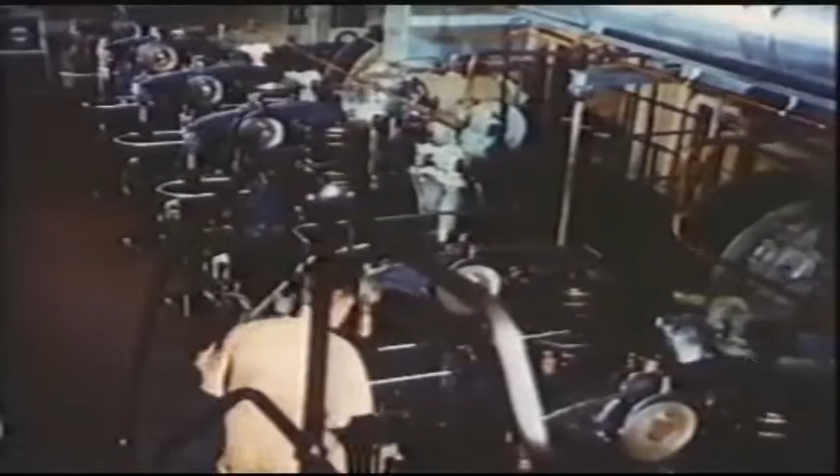Today, the diesel engine propels half the tonnage of all the world's shipping. Given good care, the diesel engine provides a maximum of effect on a minimum of oil consumption.

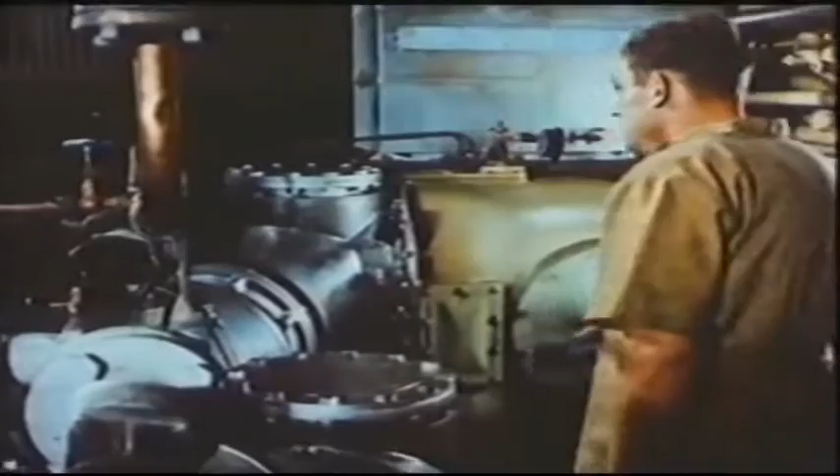The engineer will see to that. At the moment, he's checking the temperatures of exhaust and cooling water. His routine inspection takes him further down to the second platform with the intercoolers for charging air.

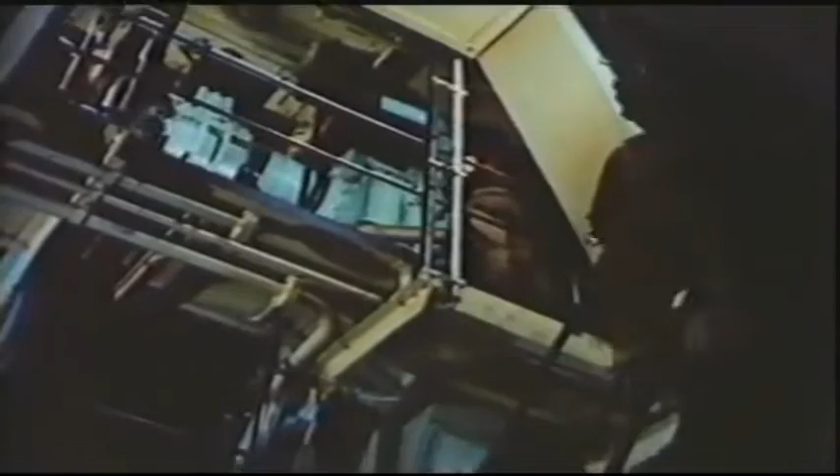Now he reaches the bottom, where his flashlight reveals the return piston cooling oil behind the sight glasses. To make a further study of the diesel engine, we leave the engineer and his instruments and put sight glasses on the engine from top to bottom.

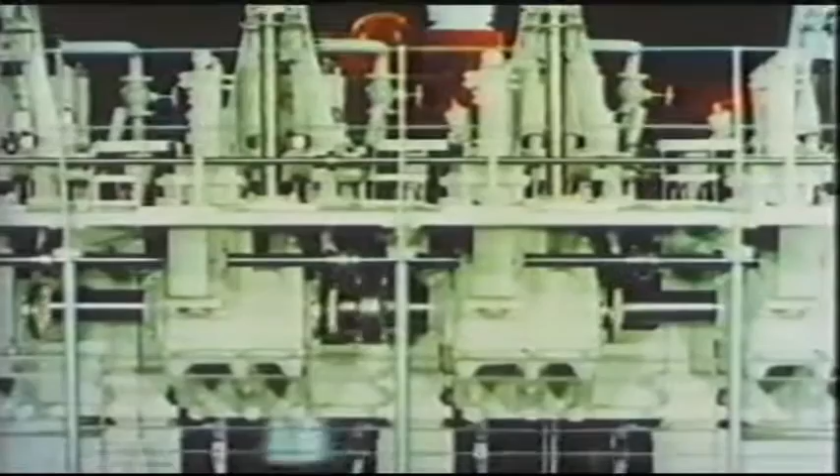This reveals the movable parts: pistons, piston rods, crossheads, and connecting rod and crankshaft.

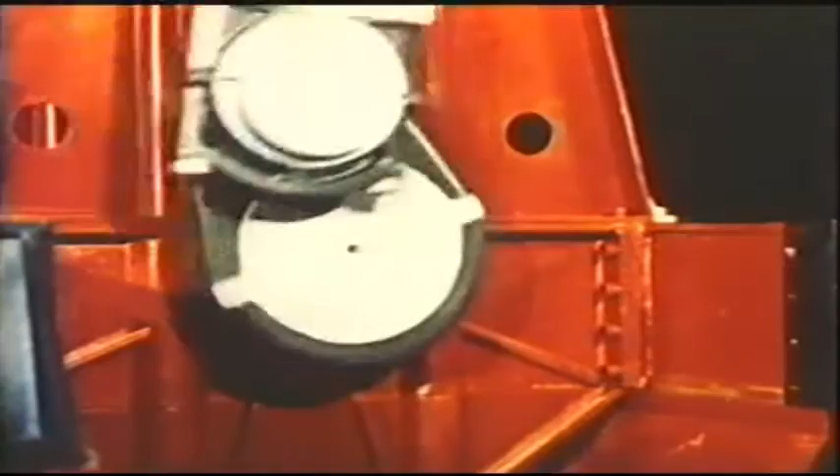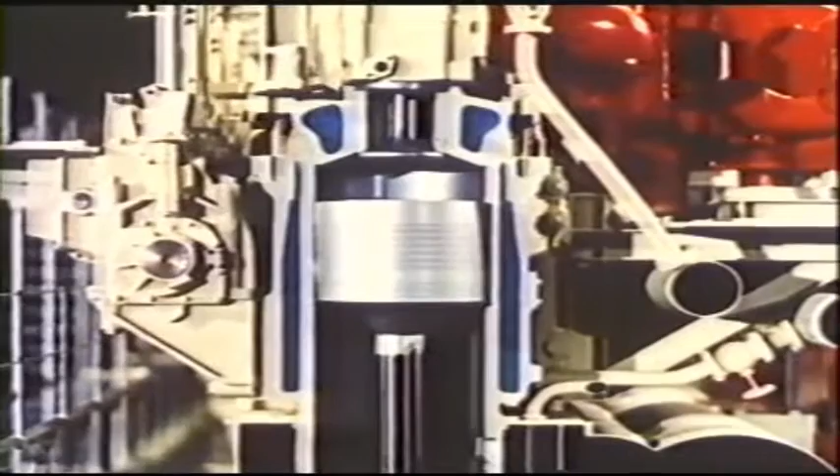This sectional view shows the function which the most important parts of the engine have to perform. In the upper part of the cylinder, an amount of fuel oil is burnt, which causes the temperature, and thereby the pressure, to rise in the combustion space.

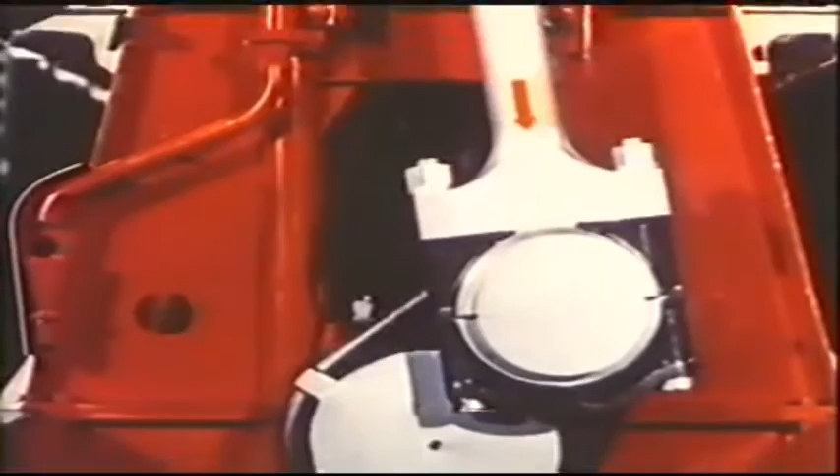The gas pressure acts on the piston, from which the force is transmitted through piston rod and crosshead to the connecting rod, and results in a torque. The thermal energy has been converted into mechanical energy.

In an arbitrary piston position during the working stroke, the crosshead is exposed to a vertical force from the piston rod and a force in the direction of the connecting rod, which together result in a horizontal force.

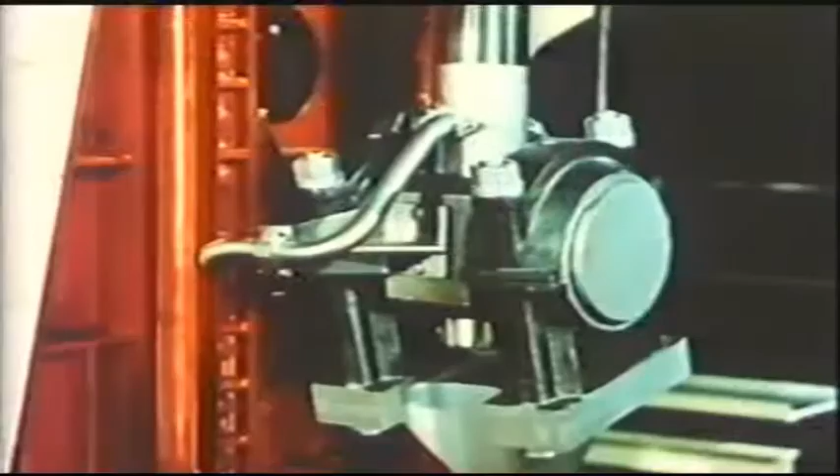This horizontal force must be transmitted to the engine frame, and for this purpose the crosshead is provided with slide shoes supported on vertical surfaces, the guide faces on the engine frame.

Powerful forces are at work in a big marine engine, and accordingly the engine parts are of big dimensions. In the workshop, with people providing a natural yardstick, one receives a good impression of their size.

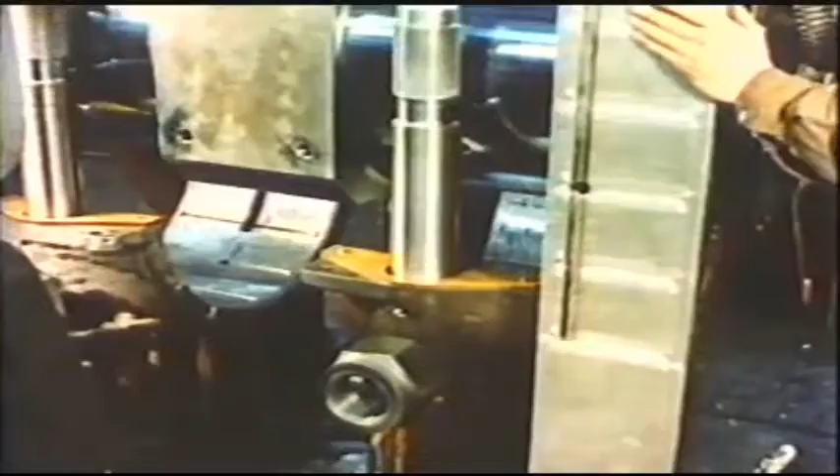So big must the crosshead slide shoes be in order to transmit the horizontal forces. The high points in the connecting rod bearing, which have been spotted by the contact with the crosshead pin, are scraped off in thin chips.

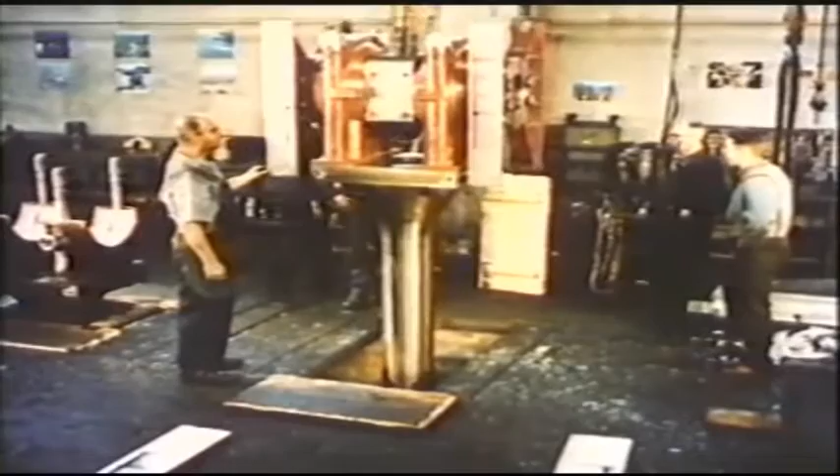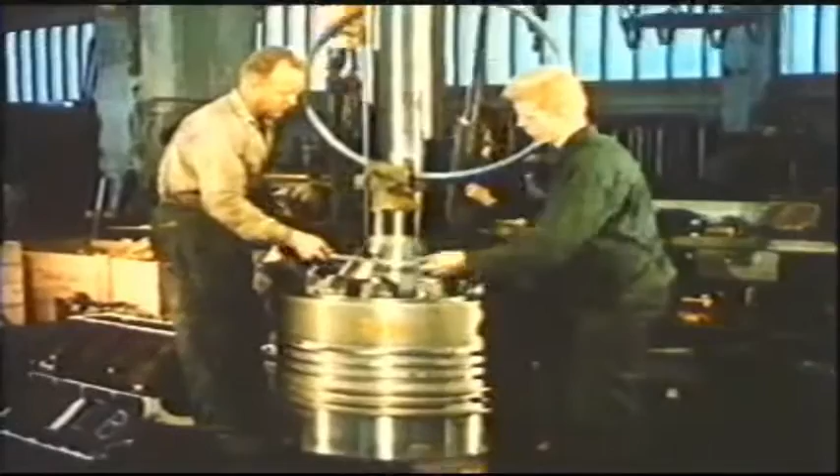To provide tightness against the high pressures, the piston is fitted with piston rings. The ring is fitted by a special tool which imparts an evenly distributed bending moment to it, thus preventing the danger of a permanent deformation.

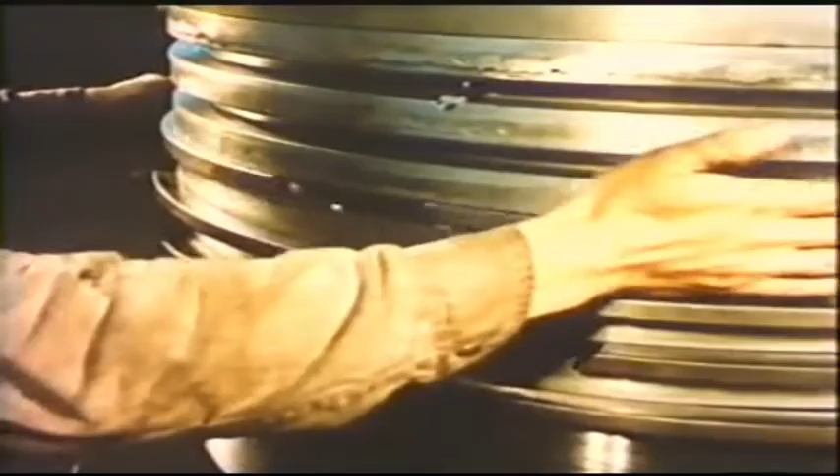Cylinders are not easily overlooked either. The scavenge air ports are bored oblique to a diametral plane to set the scavenge air in rotation.

The crankshaft is so big that to facilitate manufacture and installation, it's made in two halves, which are bolted together later. Each half is built up from a number of individual parts.

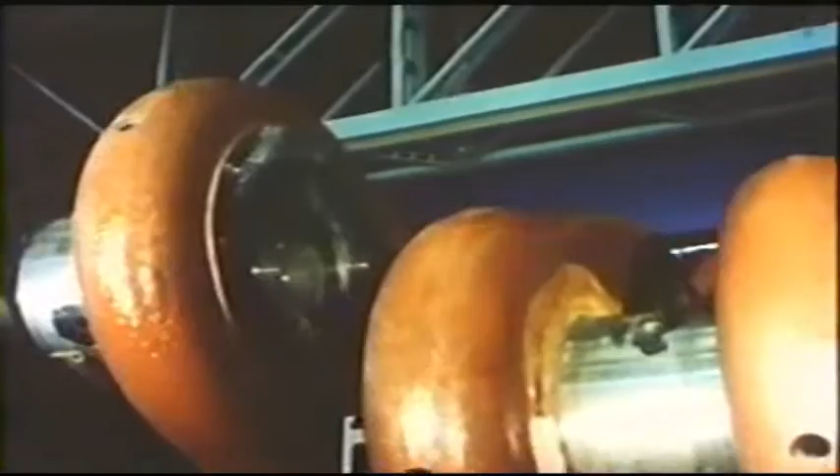Main bearing journals, crank webs, and crank pins. The crank webs are provided with counterweights.

Let's look a little closer at the principle on which a two-stroke engine works. Fresh air is supplied by a blower. From the blower, it's conducted in a pipe along the engine to the scavenge air space around the cylinder.

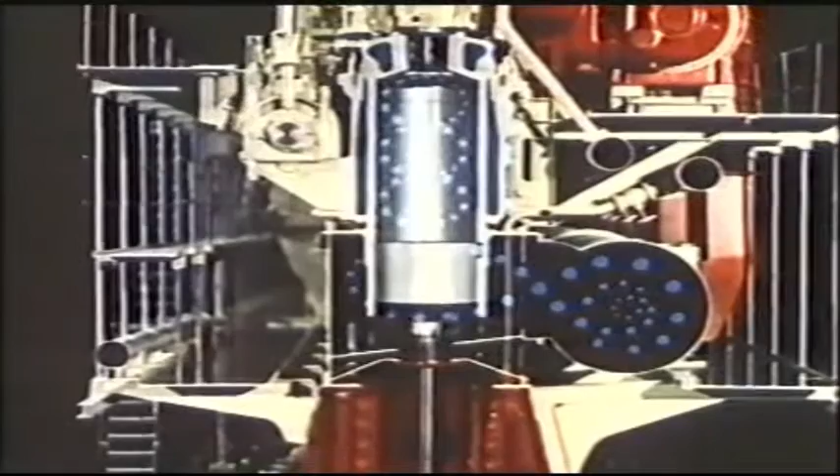When the piston approaches the end of the downstroke, the exhaust valve opens, the scavenge air ports are uncovered, and fresh air flows up through the cylinder.

Exhaust valve and scavenge air ports are then closed, and during compression, the air is heated for ignition of the injected fuel.

The combustion increases the temperature and thereby the pressure which drives the piston. The exhaust valve opens, the pressure falls, and the combustion products are expelled. The air is again compressed.

Fuel is injected, ignited. The gases expand. The exhaust valve opens, then the scavenge air ports. The cylinder is scavenged, and the cycle is repeated.

The power developed by an engine depends on the pressure events in the cylinder. The pressure events can be recorded by means of an indicator connected to an outlet from the combustion space.

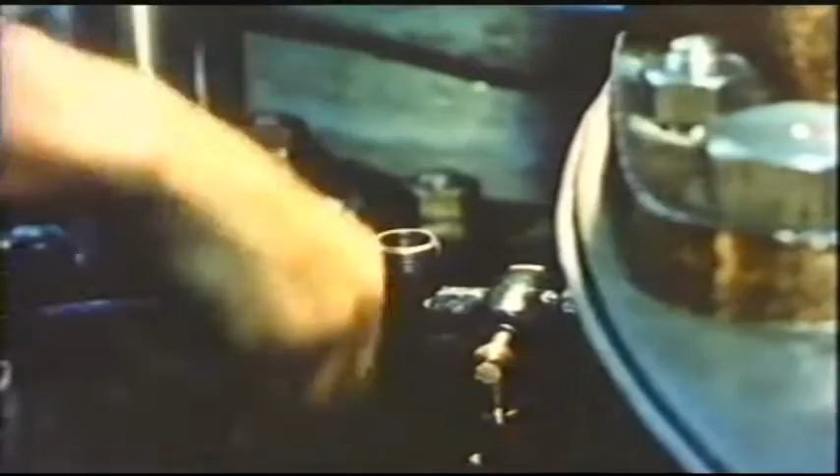The pencil is now moving in time with the pressure variations inside the cylinder. The drum carrying the paper is connected to the drive from the engine piston, its motion proportionate to the piston motion. The pencil records the pressure events during an engine cycle.

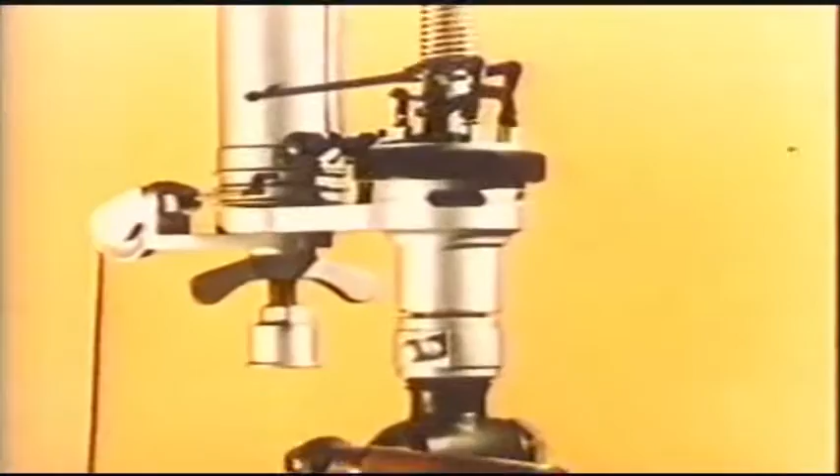The construction of the indicator is simple. Through a duct, the gas pressure is transmitted from the combustion space and acts on the indicator piston moving inside a small cylinder.

The motion is resisted by a spring. This spring is exchangeable so that it may be adjusted to different pressure ranges.

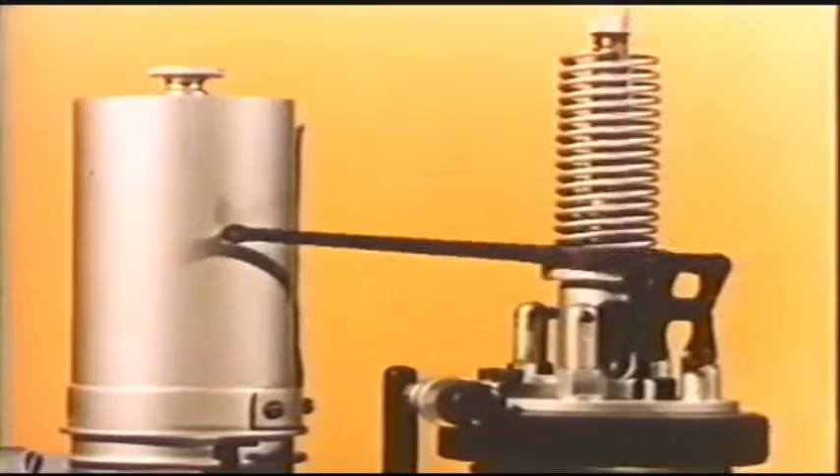The motion is communicated to a lever at the point of which a pencil is fastened. The pencil is pressed against a drum moving back and forth with the up and down motion of the engine piston. Thus, a curve is traced which shows the relation between the gas pressure in the engine cylinder and the position of the piston.

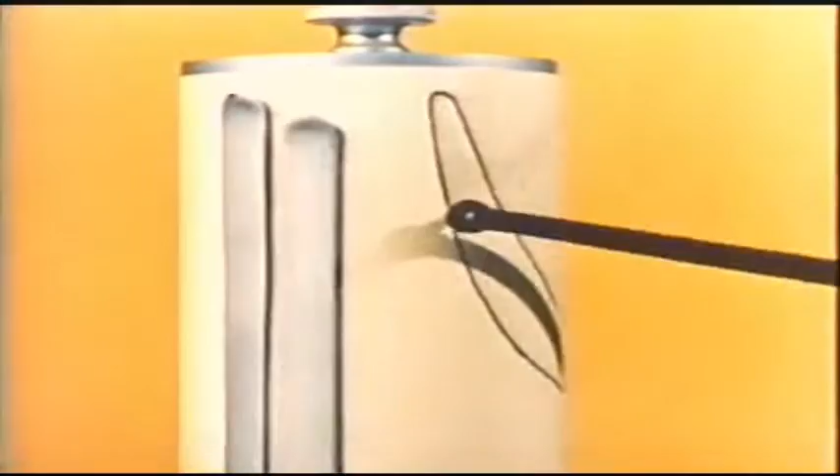The output of an engine is dependent upon the relation between pressure and volume in the cylinders during compression, combustion, and expansion.

For each separate cylinder, the indicator traces a curve, the so-called PV diagram. The diagram shows that the pressure is almost equal to the scavenge air pressure when the scavenge ports are uncovered. The exhaust valve and scavenge ports are then closed. The air is compressed, and when the fuel is injected and ignited, the pressure will rise rapidly and remain at maximum during continued injection. After injection, the pressure in the cylinder falls to exhaust pressure, and during the exhaust period

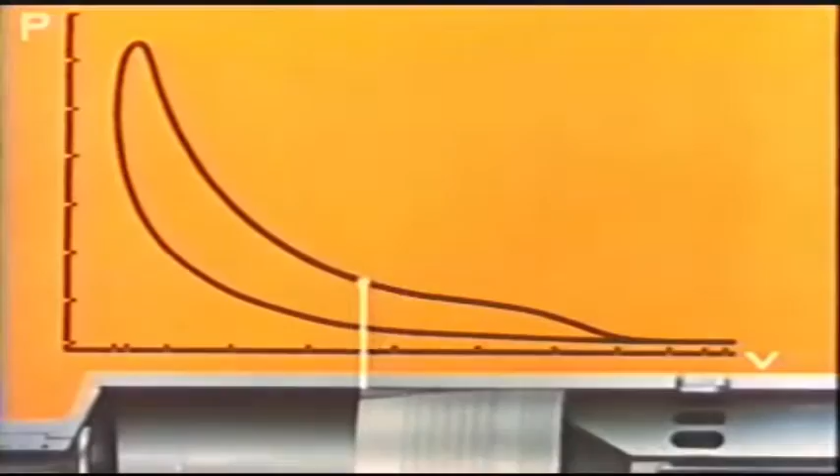to scavenge air pressure: scavenging, compression, combustion, expansion, exhaust, and back to scavenging.

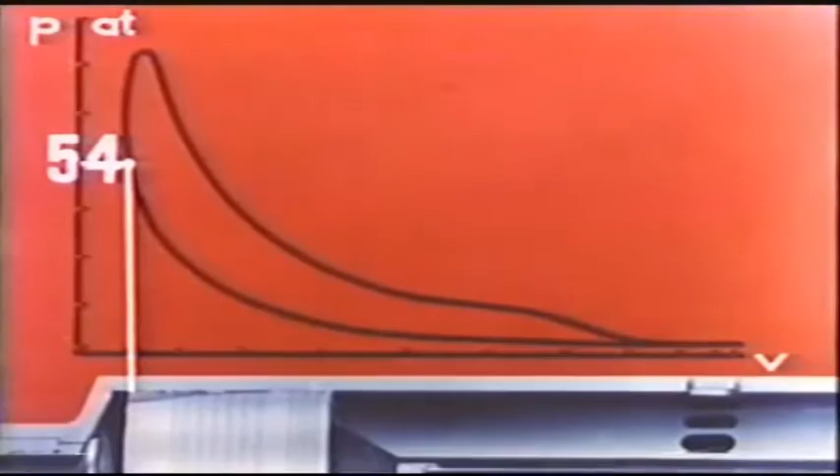The characteristic pressures are approximately a compression pressure of 54 kilograms per square centimeter, maximum pressure 66, exhaust pressure 8, and scavenge air pressure 1.75 kilograms per square centimeter.

From the indicator diagram, the indicated output may now be computed. At an arbitrary position of the piston during the compression stroke, there is a certain pressure, P, acting on the piston top. If the piston travels a short distance further, corresponding to delta V, and if we ignore the minimal change in pressure, the amount of work done, delta A, will be given by the pressure multiplied by the change in volume, or P times delta V.

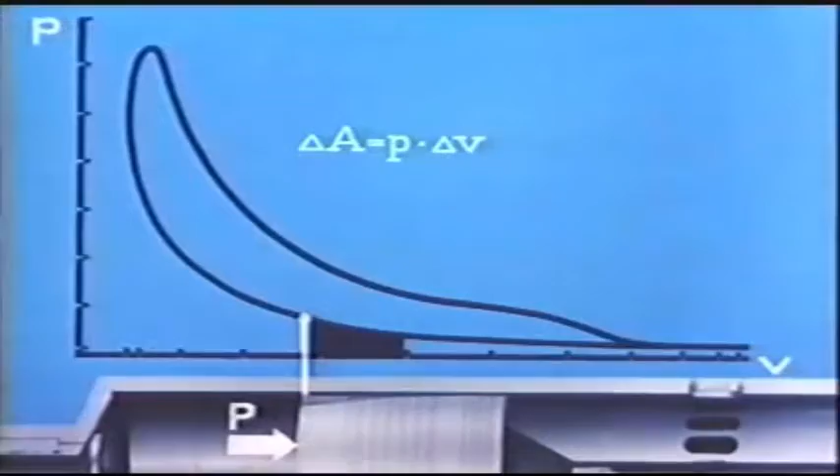This work is represented by the area below the part of the compression line corresponding to delta V. And the same applies to every single part of the compression curve. That is to say that the whole area below the compression line represents all the work that the piston must perform to compress the air in the cylinder.

During the expansion, the piston pressure acts in the same direction as the piston is moving. So therefore the piston receives an amount of work, and it will be seen in the same manner as before that the amount of work received is represented by the area below the expansion curve.

The amount of work transmitted to the piston during a full engine revolution must therefore be the difference between that delivered during the compression and that received during the expansion. In other words, it is given by the area between the curves. Thus, A equals sigma P multiplied by delta V.

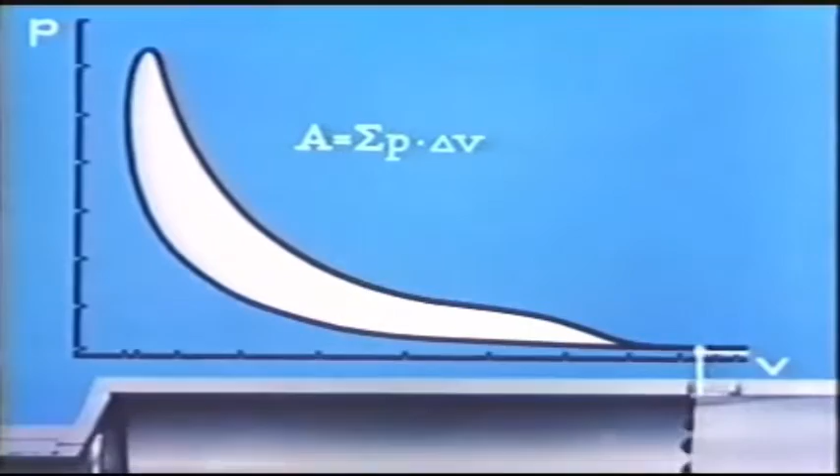One could imagine the same area being produced by a compression stroke under atmospheric pressure and an expansion stroke with a constant pressure on the piston. This constant pressure, Pi, the mean indicated pressure, can be determined so that it gives the same area as in the actual diagram.

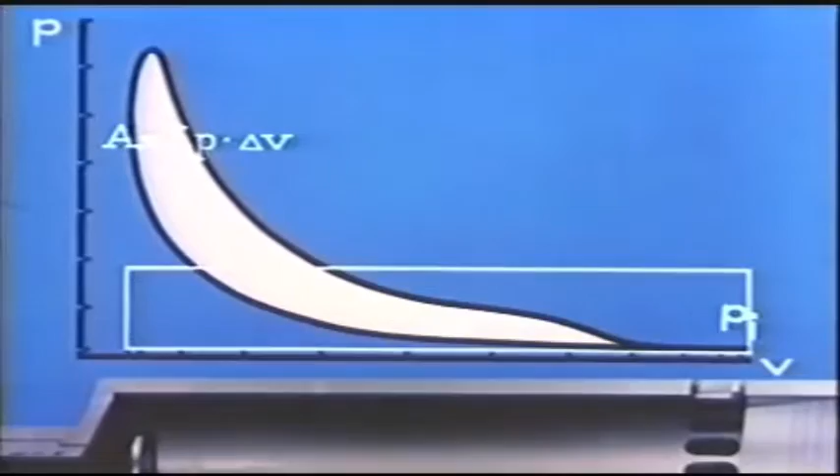In calculating the power, it is a great advantage to have to reckon only with a constant Pi during the expansion stroke, instead of the actual varying pressures in both the compression and the expansion strokes.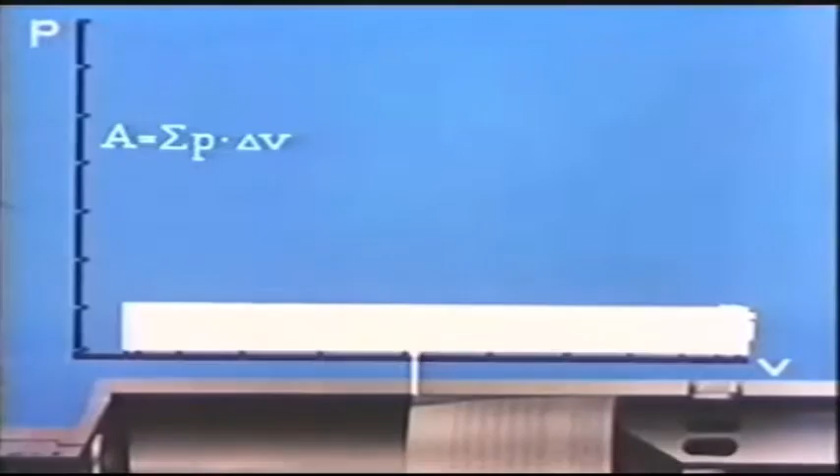The work in kilogram centimeters for one revolution will thus be A equals Pi multiplied by Vs, where Vs is the full stroke volume in cubic centimeters, and Pi the mean indicated pressure in kilograms per square centimeter. There is one working stroke in each revolution, so if we multiply by the revolutions per second, n over 60, we get the work in kilogram centimeters per second, that is to say, the power.

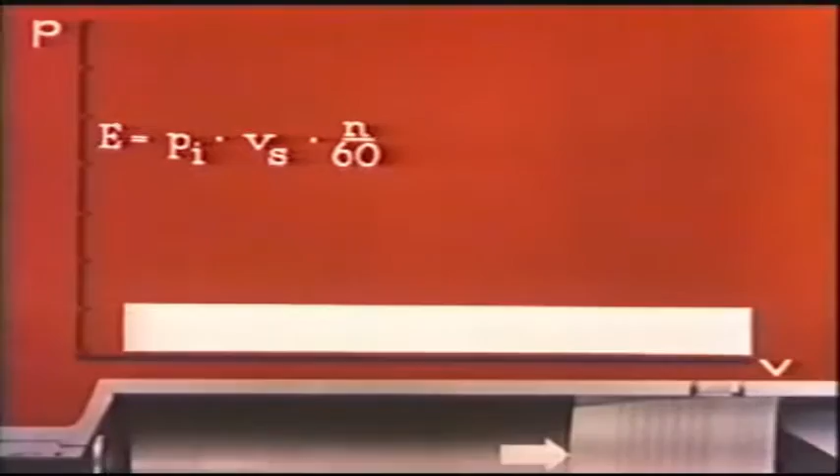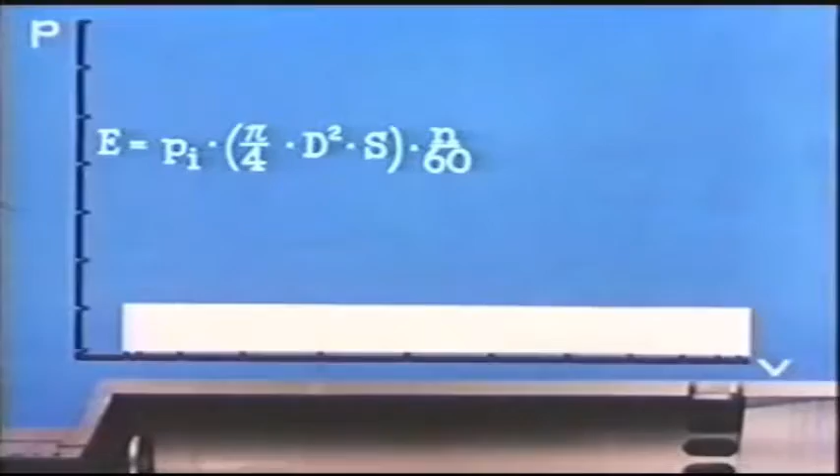Instead of Vs, we substitute the piston area multiplied by the stroke length, that is, pi over 4 multiplied by d squared multiplied by s cubic centimeters. To arrive at the output in horsepower, 75 kilogram meters per second, we have to divide by 7,500, and we thus have the equation for computing the horsepower developed in each cylinder of the engine.

To take an example, an engine with a Pi of 9.5 kilograms per square centimeter, a piston diameter of 84 centimeters, a piston stroke of 180 centimeters, running at 110 revolutions per minute, will have an indicated output of 2,300 horsepower per cylinder.

The largest force acting on the piston is the highest combustion pressure less the atmospheric pressure on the underside of the piston multiplied by the piston area, or 65 multiplied by pi over 4 multiplied by 84 squared. That is 360,000 kilograms.

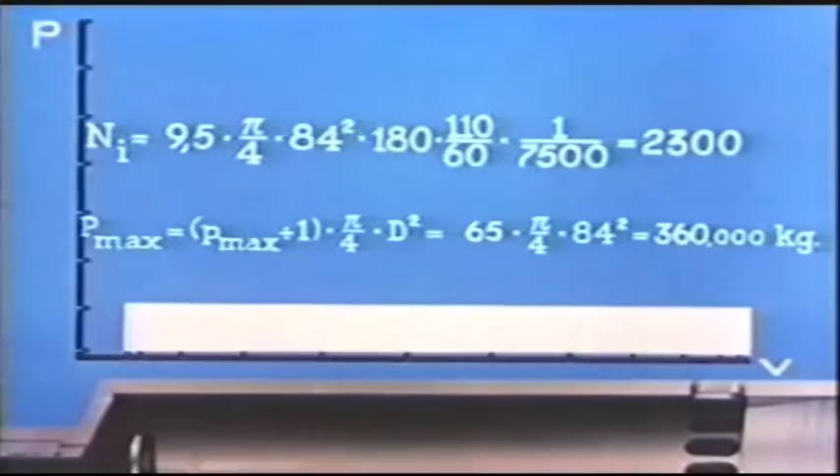The indicator diagram may also form the basis for computing the temperatures in the cylinder. Just after the scavenging, at the beginning of compression, the temperature is TO, the volume VO, and the pressure PO.

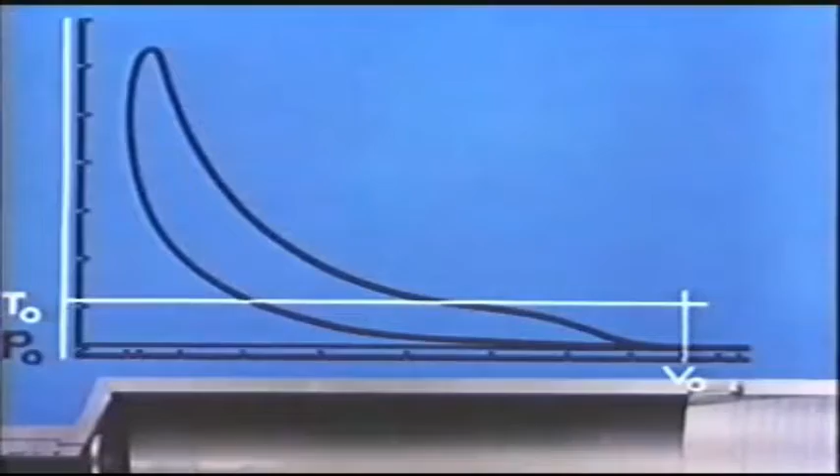From thermodynamics, we know that the pressure multiplied by the volume divided by the temperature is constant for an isolated amount of air, which is the case here in the cylinder, independent of the position of the piston, so long as the valve and the scavenge ports are closed.

The equation can be rearranged to express the temperature T direct for an arbitrary position of the piston. The indicator diagram gives us the values that are to be substituted in the equation when computing the temperature for the top position of the piston.

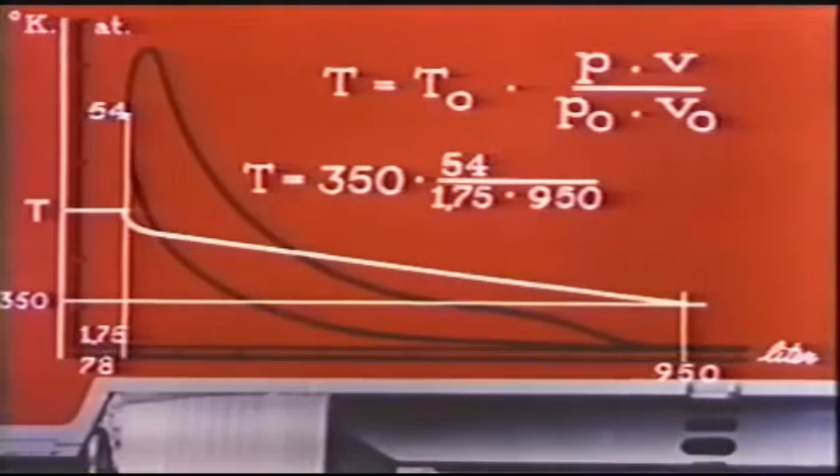Substituting the initial temperature, 350 degrees Kelvin, the initial pressure, 1.75 kilograms per square centimeter, the initial volume, 950 liters, the pressure in top position, 54 kilograms per square centimeter, and the compression volume, 78 liters, we find the temperature to be 890 degrees Kelvin.

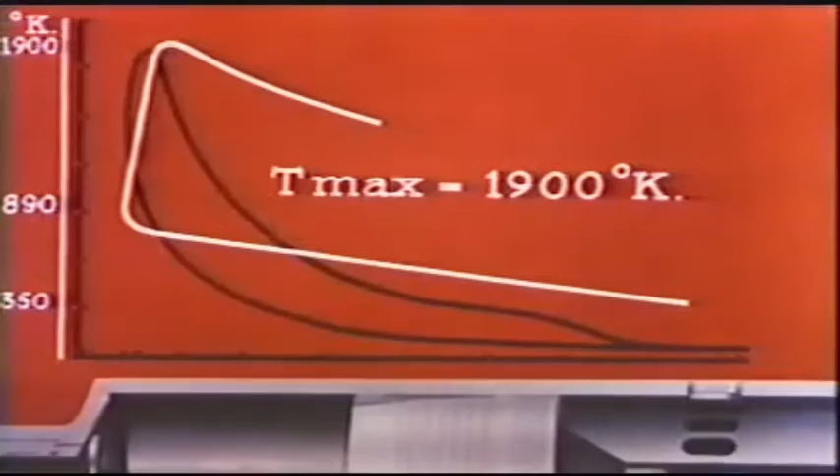The highest temperature occurs at the cessation of combustion. It is here found to be 1900 degrees Kelvin. In this way, the whole of the temperature curve may be calculated, right up to the moment when the exhaust valve opens. To get a better idea of what is happening, we will measure in degrees centigrade instead of degrees Kelvin.

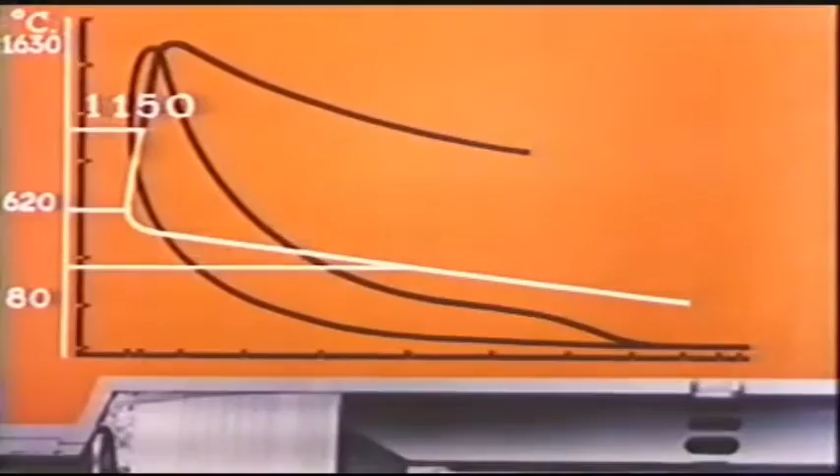Already during compression, the temperature reaches the melting point of lead. During the first part of the combustion, the temperature reaches the melting point of aluminium. Shortly after that, the temperature reaches the melting point of cast iron. The high temperatures in the cylinders even exceed the melting point of steel.

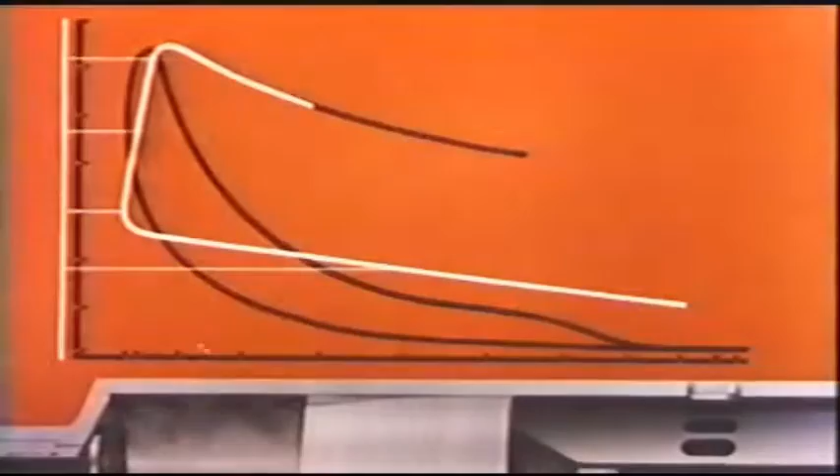Combustion takes place so quickly, however, that there is not time for the high temperatures to be transferred to the cylinder wall. The temperature of the metal surfaces will not exceed the mean temperature of the process, about 620 degrees centigrade. Then again, the cylinder is made of cast iron, which begins to lose its strength already at around 300 degrees centigrade, besides which the lubricating oil will lose its lubricating ability if it becomes too hot.

It is therefore necessary to provide efficient cooling, partly with oil or water led through the piston rod up into the piston itself, and partly with water circulating through the cooling jacket around cylinder and cylinder head. If a cooling water temperature of about 70 degrees centigrade is maintained, we can prevent the temperature on the inside of the cylinder wall from exceeding 300 degrees centigrade. This is possible because there is a drop in temperature as the heat passes from air to metal.

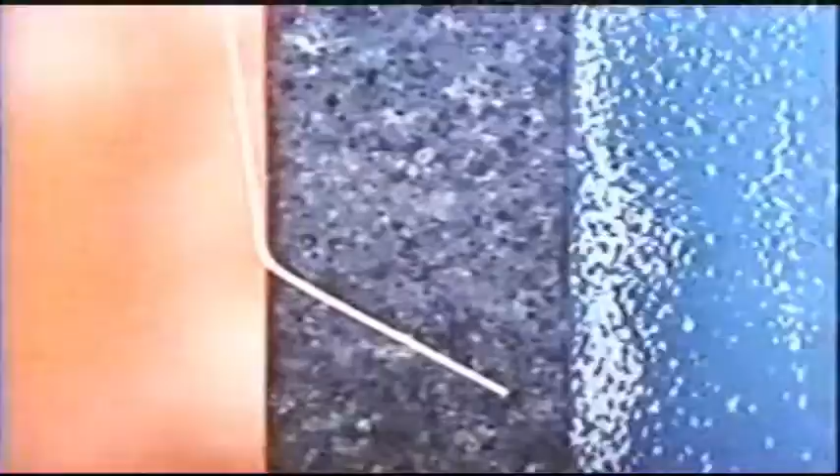The gas molecules are in violent motion inside the cylinder, but out near the wall they are slowed down and form an insulating layer. This causes a rapid fall in temperature at the boundary between gas and metal. Through the wall itself the temperature falls evenly, but as the heat flows into the cooling water, there is again a sudden drop in temperature owing to the retarded motion of the water molecules in contact with the wall.

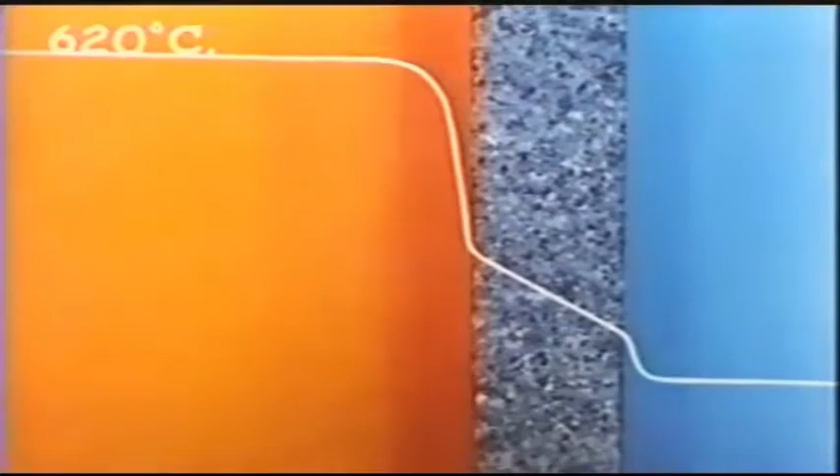The mean temperature of the gas is 620 degrees centigrade, and the cooling water is kept at 70 degrees centigrade. It is possible to calculate a thickness of iron that offers the same resistance to heat flow as the boundary resistance between air and cylinder wall, and similarly a thickness of iron that corresponds to the boundary resistance between cylinder wall and water.

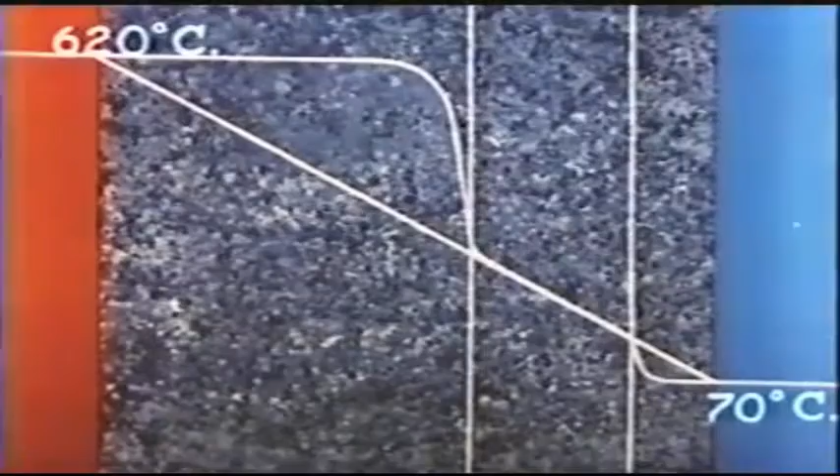As the drop in temperature through the entire homogeneous iron wall will occur evenly, the temperature of the original cylinder wall can be determined. These temperatures, which are calculated for the hottest point in the cylinders, explain why the materials are able to withstand the high combustion temperatures.

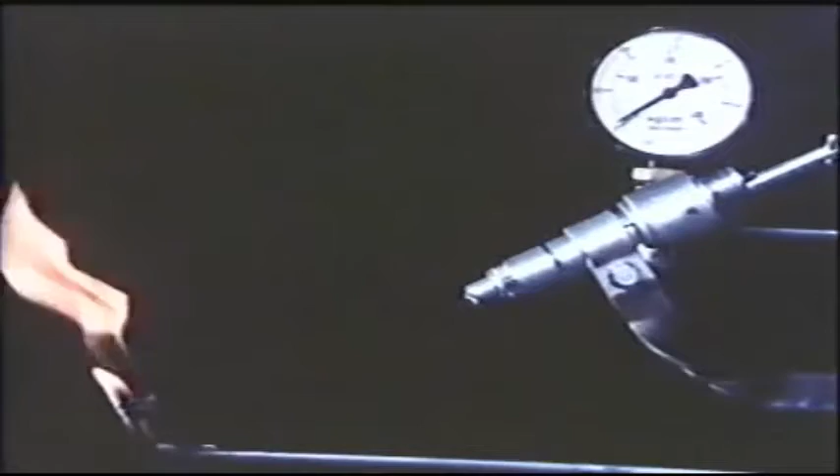A strong atomization of the oil is a condition for the short time of combustion. Without atomization, the oil will not ignite at all, even though the stream passes right through a flame. If the pump pressure is raised to 80 atmospheres, the oil is more finely atomized, but not enough to ensure reliable ignition.

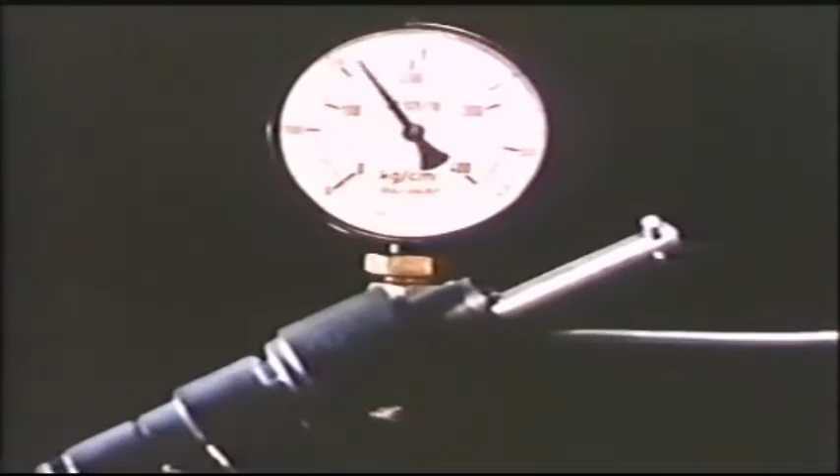At a pump pressure of about 200 atmospheres, the atomization is so good that all injections are ignited. At the same pressure and continued injection, a flame is formed. But the flame soon dies out owing to lack of oxygen. Not until air is admitted through the pipe in the lower part of the picture can the flame be kept burning. The flame is formed some distance from the nozzle.

The distance between nozzle and flame is about 4 decimeters. This corresponds to an interval of 1/400th of a second from the start of injection to the start of ignition, the delay period. In the hot engine, the ignition delay is approximately half.

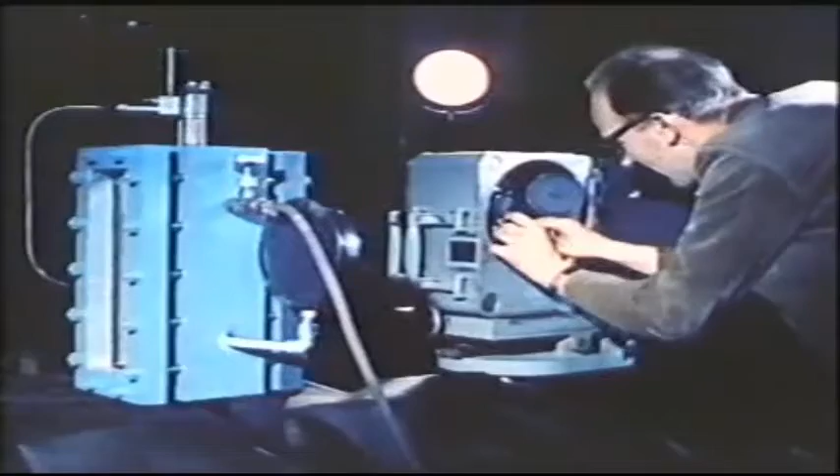An experimental setup with a pressure chamber and a high-speed film camera taking 3,000 pictures per second will show the dependence of atomization upon the friction between oil droplets and air molecules.

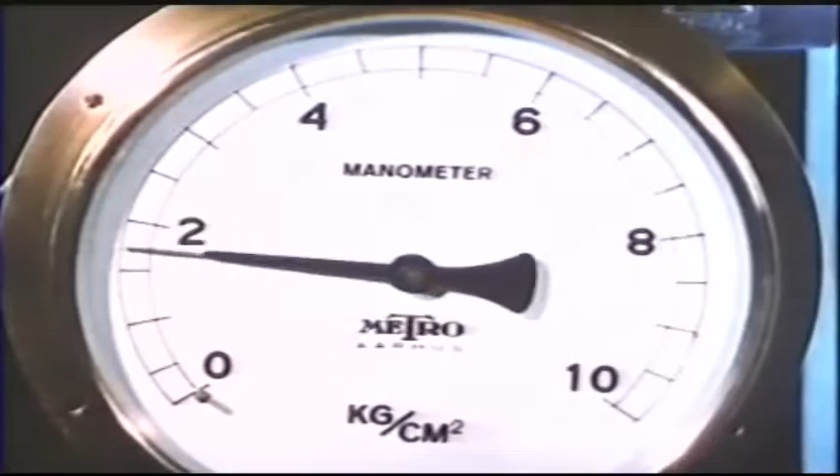First, a vacuum is created in the pressure chamber, and the high-speed camera shows the appearance of the stream before it hits the bottom of the chamber. Then the vacuum is succeeded by a pressure of 2 atmospheres, and the high-speed camera registers the stream, which now has smaller droplets and a wider spray angle. The friction with the air molecules will be greater and atomization better when the oil is injected under high pressure.

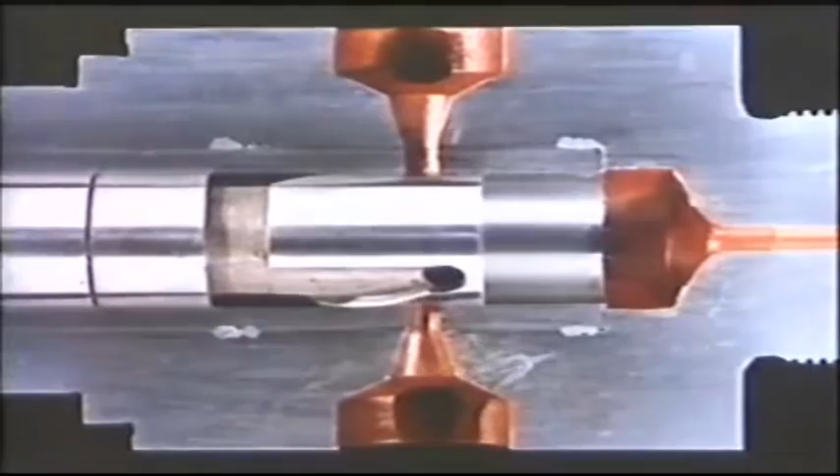In the diesel engine, the pressure is produced by a fuel pump. The oil is taken in through a ring chamber, from where it is drawn out into the pump barrel, connected by a hole in the front of the plunger to a milled-out recess in the plunger. The oil flows from the pump through a filter to a closed duct in the fuel valve.

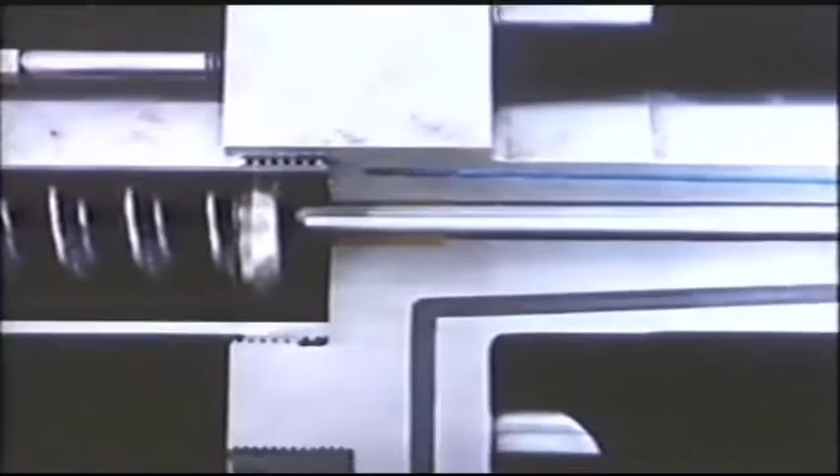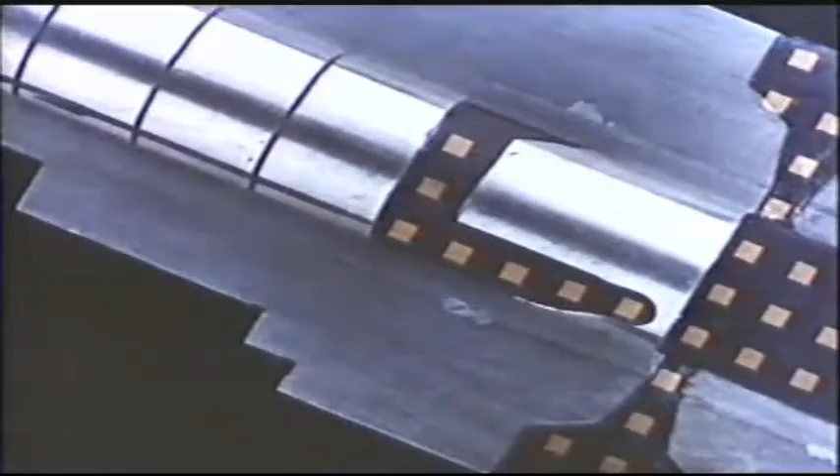A heavy spring presses on the needle valve, which bars further access to the nozzle. The rise in pressure begins when the plunger has closed the inlet port.

The oil presses on the conical end of the needle valve, lifts it a trifle, whereby the pressure area is increased and the needle snaps up. The oil now streams out through the nozzle holes at a very high velocity, resulting in a fine atomization.

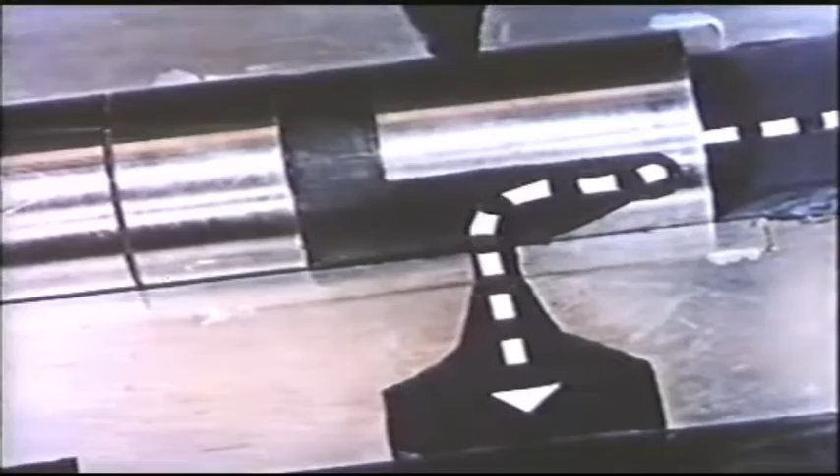When the helical groove of the plunger passes the inlet port, the oil may flow freely back into the ring chamber during the continued movement of the plunger. The moment the plunger uncovers the inlet port, the oil pressure falls and the valve spring snaps back, pressing the needle into its seat so that it shuts off access to the nozzle.

The helical groove on the plunger makes it possible to regulate the amount of fuel. If the plunger is turned in one direction, the useful stroke of the pump will be increased. If turned in the opposite direction, it will be reduced.

Not all the energy contained in the oil results in mechanical work. The process incurs losses. The losses may be localized by drawing up a heat account, a heat balance, for instance, for this engine, which is erected on a test bed and provided with the necessary measuring instruments.

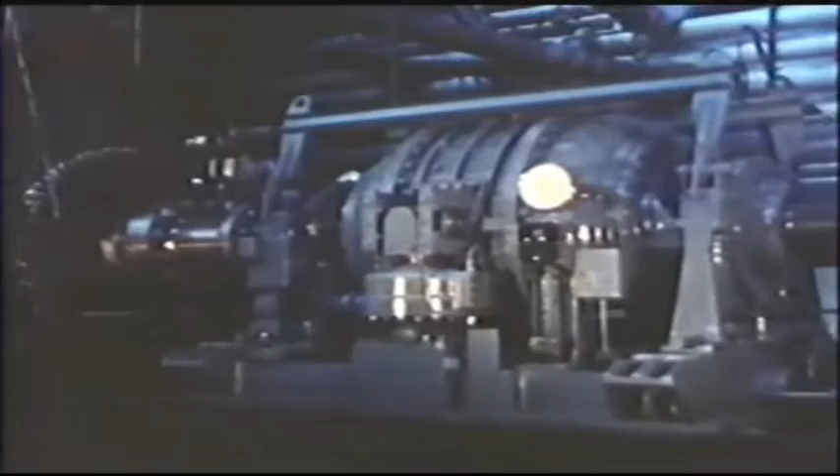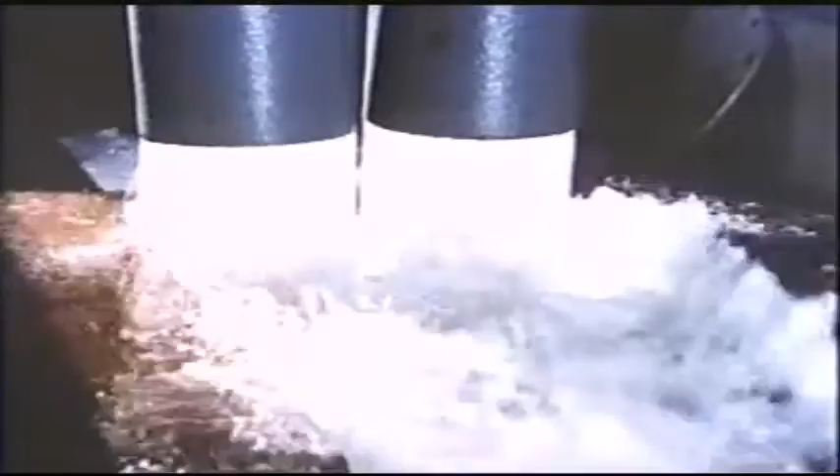The engine is receiving a final checkup and adjustment. Before the engine is started, cooling water and oil are turned on. Also, compressed air is needed for the starting.

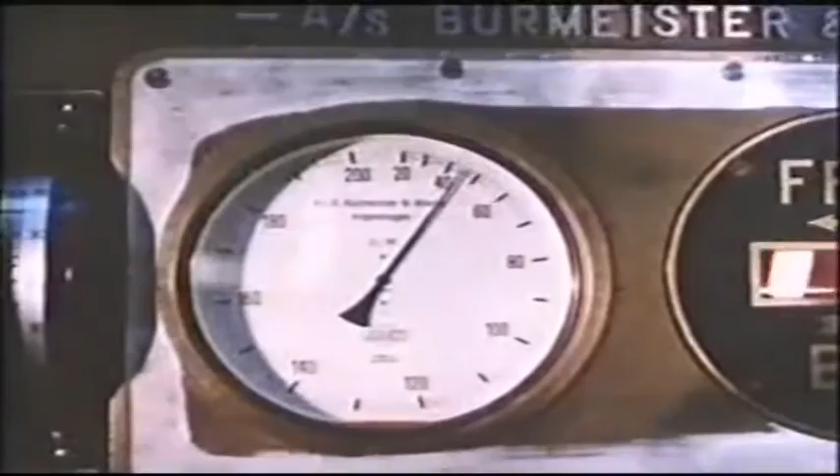The control lever is moved, regulating the fuel pumps for increased injection. The speed of revolution is rising.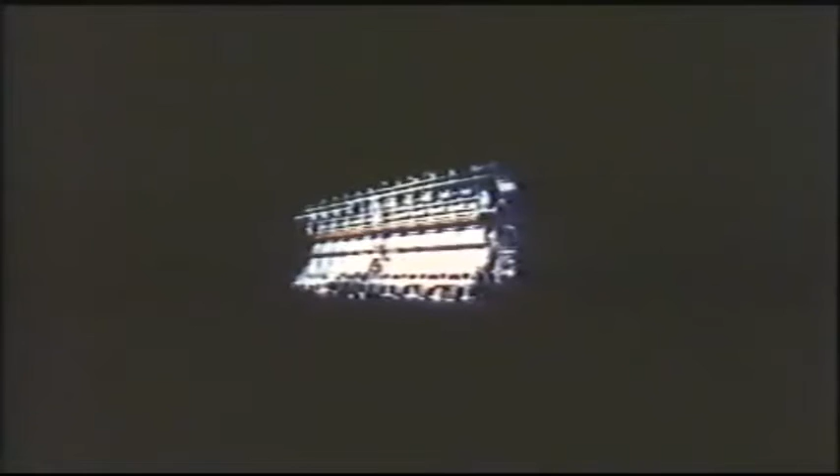Let us imagine the engine as being isolated in a box. The energy admitted to and rejected from the box is ascertained for use in the heat balance. Whatever else happens inside the box is irrelevant to the heat balance.

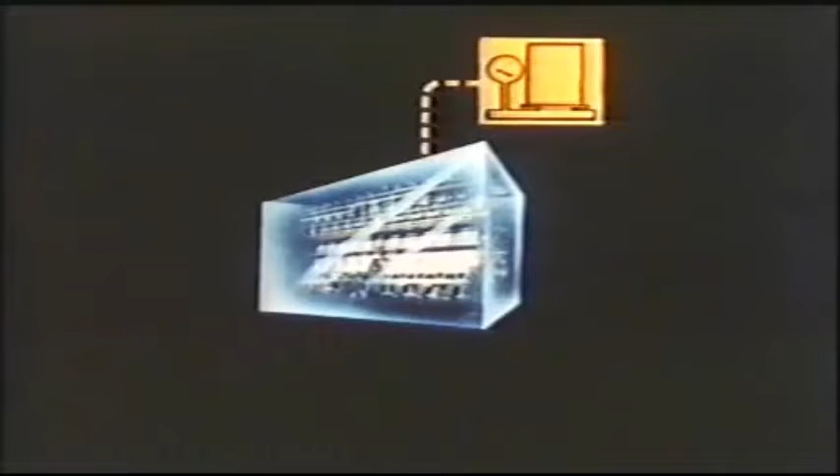Energy is admitted from the fuel tank in the form of fuel oil. Thermal energy is carried away by the heated cooling water. Thermal energy is also carried away in the hot exhaust gases. And mechanical energy is absorbed by the dynamometer.

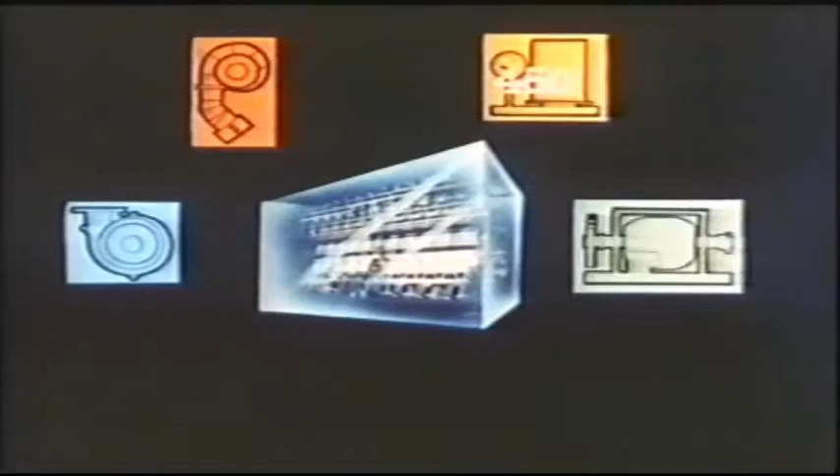If by weighing we find the amount of oil consumed in 10 minutes to be 450 kilograms, we are now able to calculate the thermal energy admitted per second. It will be 450 kilograms divided by 600 seconds multiplied by the calorific value of the oil, 10,000 kilocalories per kilogram, giving 7,500 kilocalories per second.

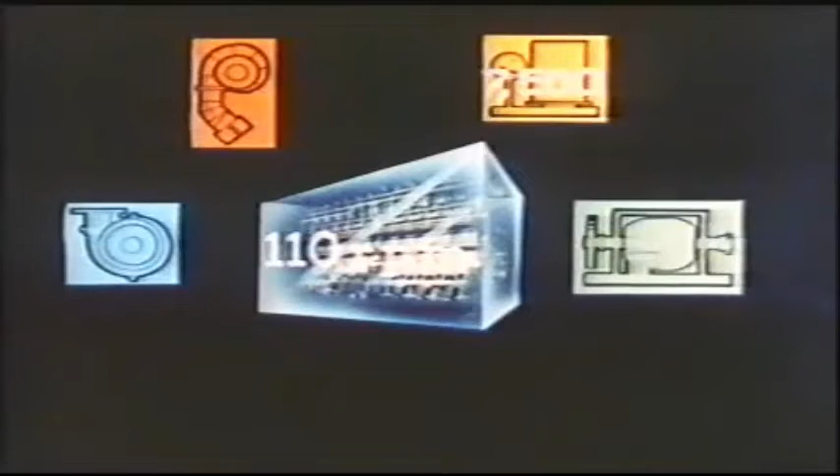The energy produced is determined by the speed of the engine, 110 RPM, and the brake torque registered on the dynamometer as 111,000 kilogram meters.

The power will be the torque multiplied by the angular velocity. To obtain the result in kilocalories per second, we divide by 427. The result is 3,000 kilocalories per second.

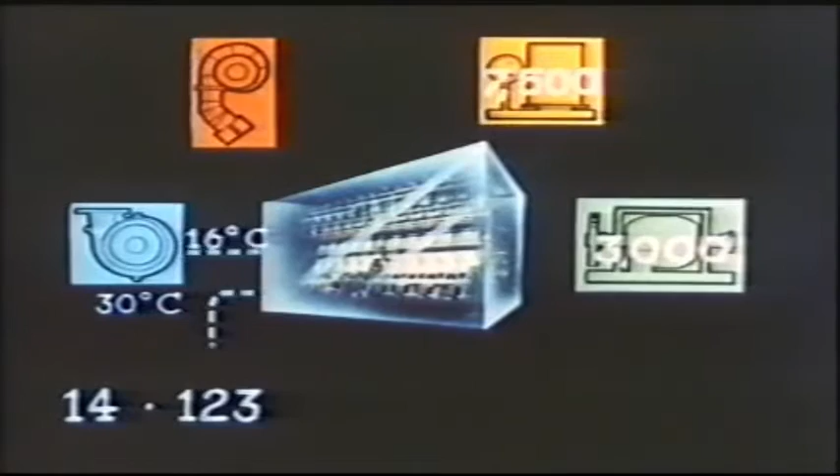The energy carried away by the cooling water is determined by the temperature rise, 14 degrees centigrade, multiplied by the quantity of cooling water, found to be 123 kilograms per second. That is 1,720 kilocalories per second.

In a similar way, the energy discharged with the exhaust gases is calculated from the rise in temperature, the amount of air, and the specific heat, and found to be 2,700 kilocalories per second.

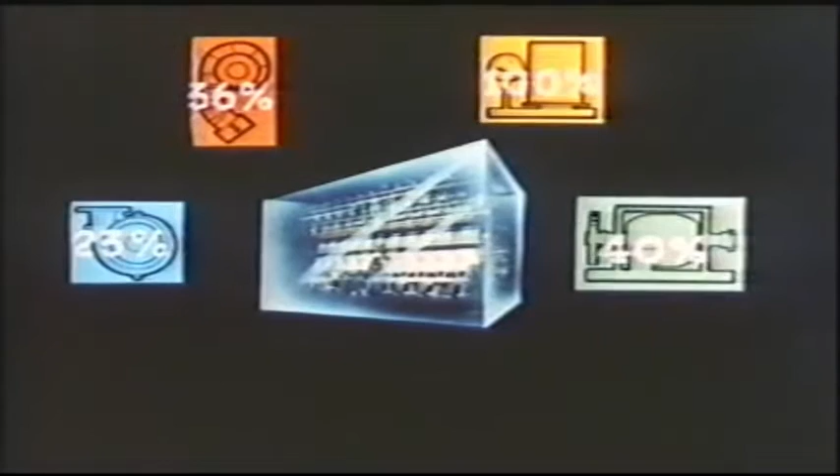A clearer picture is obtained by converting the figures into percentages of the energy admitted. Drawing up the account, we see that there is a discrepancy of 1% on the loss side. This loss of energy is ascribed to the radiation of heat from the engine, which we have not been able to measure, plus unburnt constituents in the exhaust gas.

It will be seen that the efficiency of the diesel engine is about 40%, which is more than can be attained with any other type of heat engine.

The efficiency is a deciding factor in how far a ship is able to sail on a certain quantity of fuel.

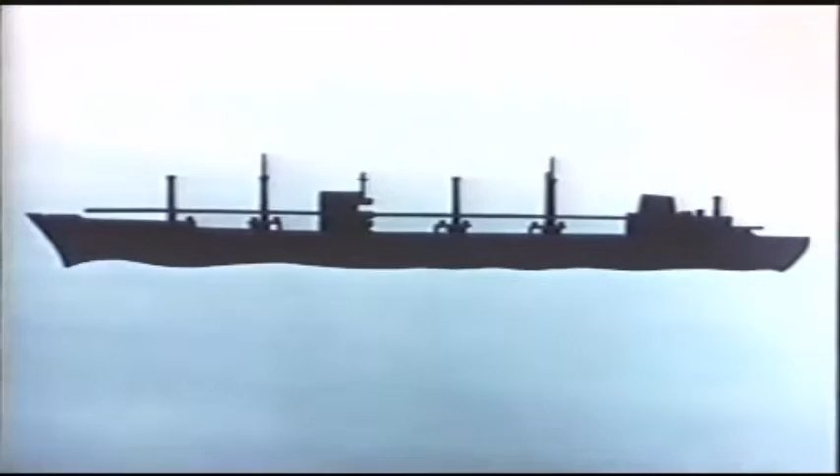If a diesel motor ship can sail 2,000 nautical miles, a steam turbine ship will sail 1,500, and a ship with gas turbine 1,000 nautical miles on a given quantity of fuel.

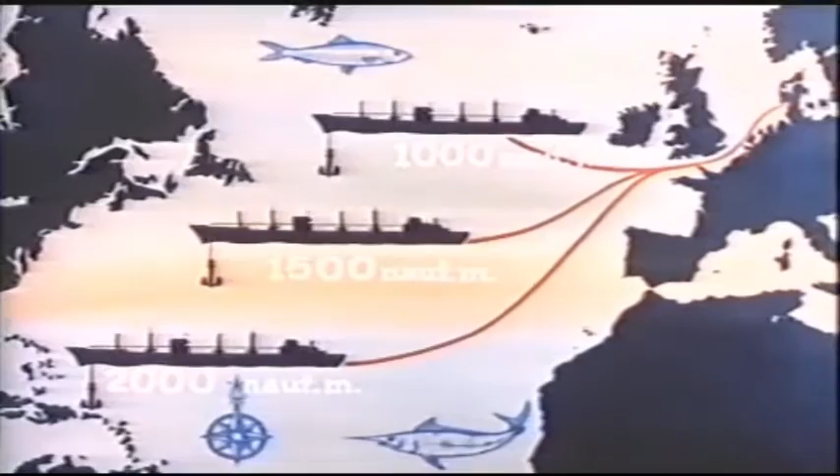The engineer is still on his job, securing a long life for his engine by checking and testing. And one thing more, by knowing the meaning and function of every little detail of his engine.